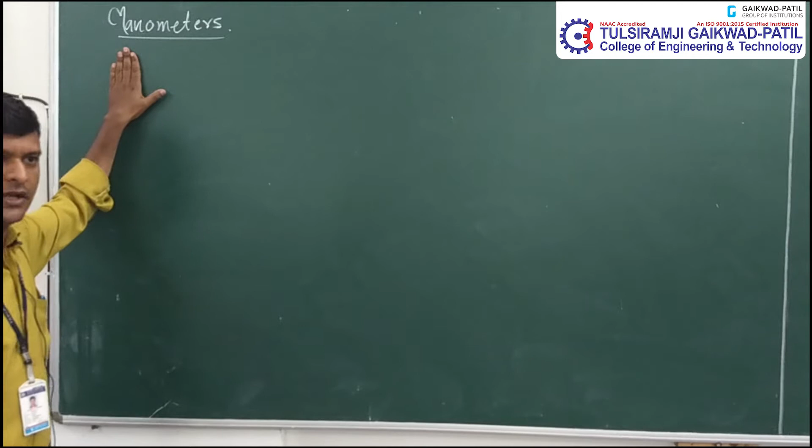So first of all, let us know what is manometer. Manometer is a device which is used to measure the pressure, by equating or by balancing the liquid column on a limb.

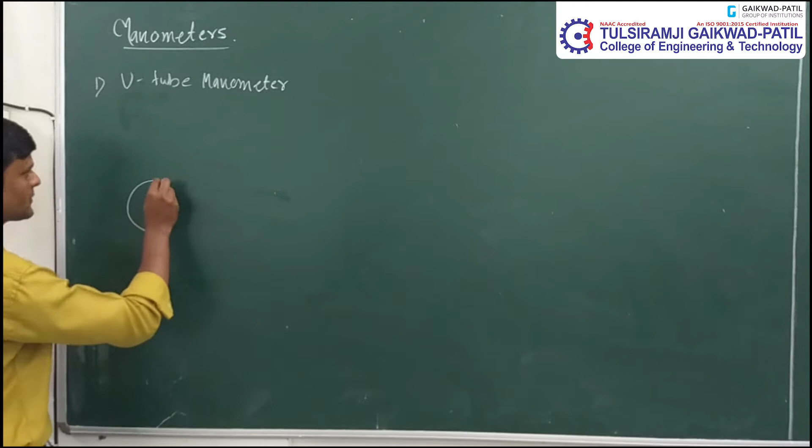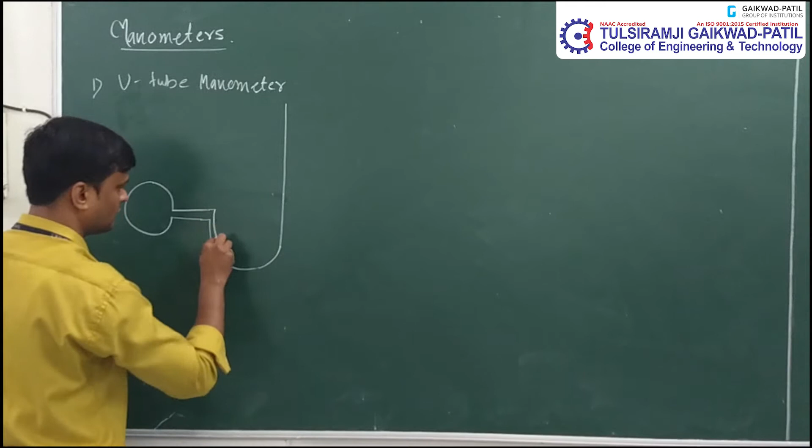There are different types of manometer. First, we will consider a simple U-tube manometer. U-tube manometer consists of two limbs. This is the simple U-tube manometer, consists of two limbs.

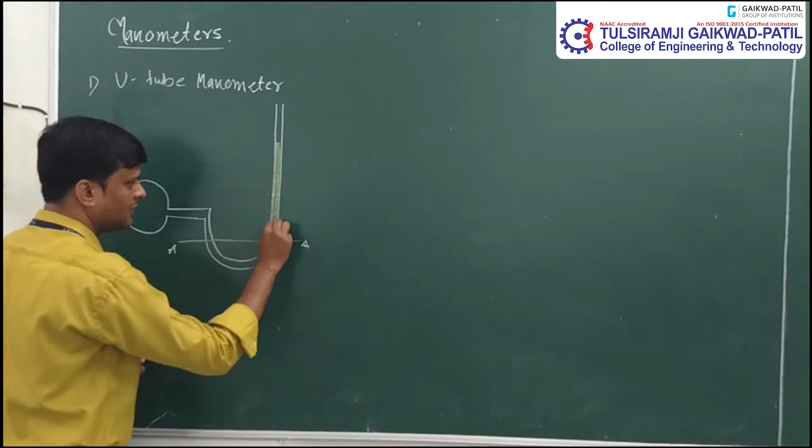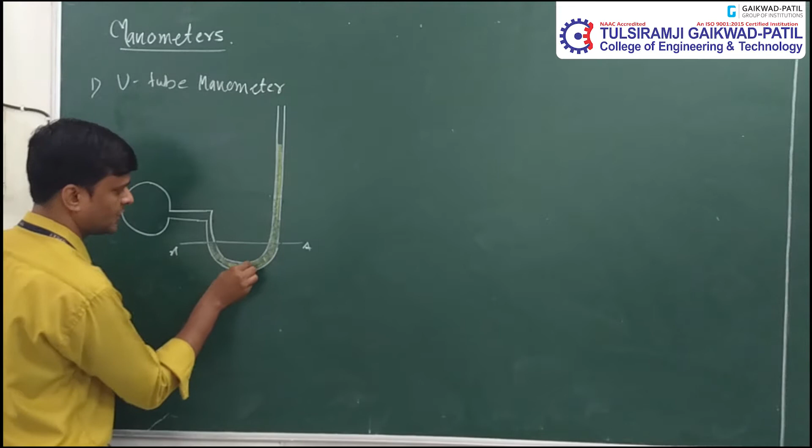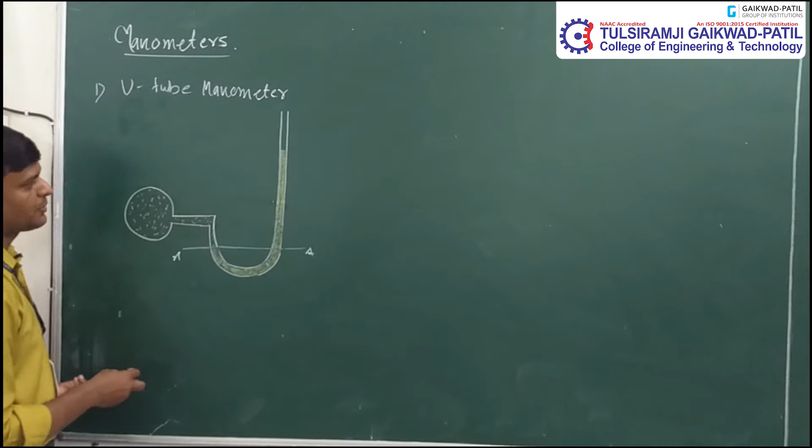This is left limb, this is right limb, and this U-tube manometer contains two different types of liquid, out of which one liquid must be heavier than the liquid whose pressure is to be measured. This is another type of liquid whose pressure is to be measured. This liquid is of low density or low specific gravity, and this liquid is having more density or more specific gravity than this liquid.

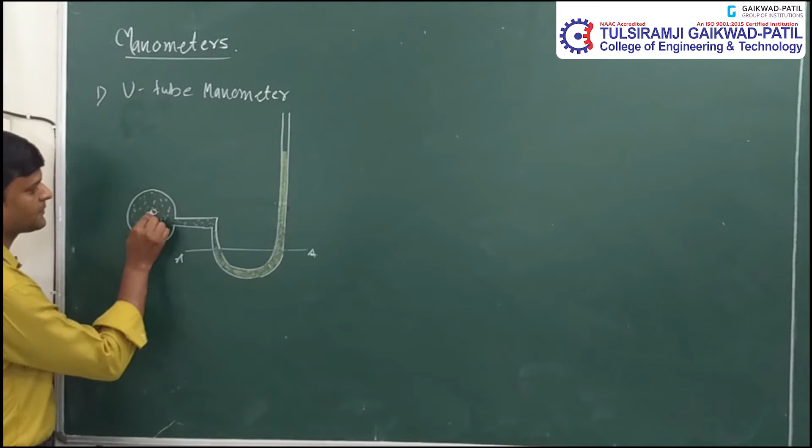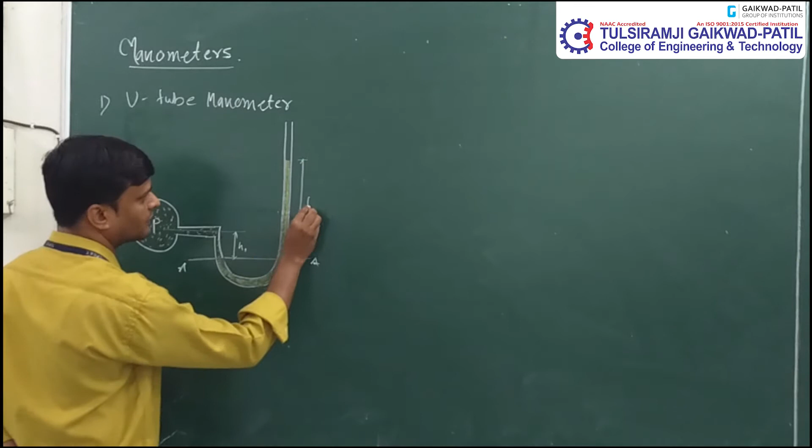So suppose this is P, the pressure which is to be measured with the help of U-tube manometer. This is the height of the liquid above the datum line on left limb. This is the height of heavier liquid above the datum on right limb, that is H2.

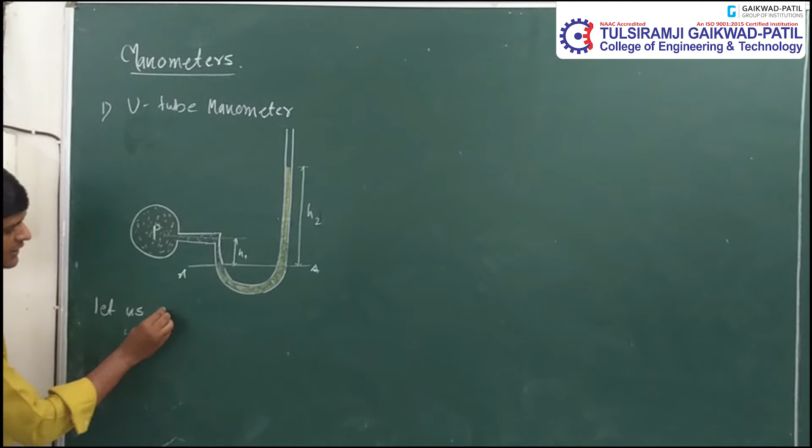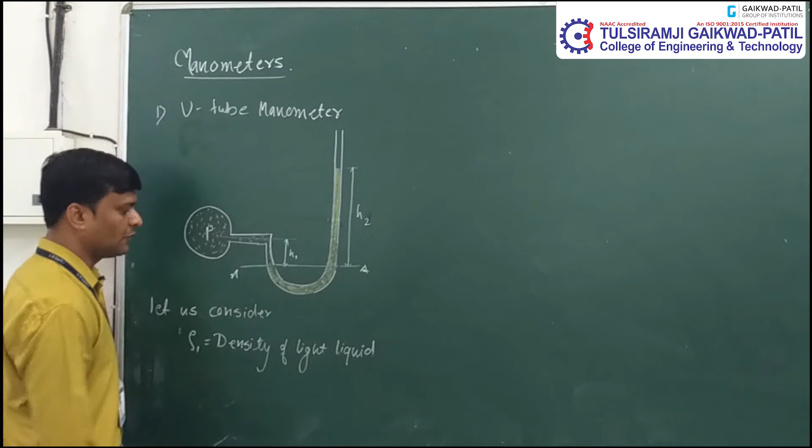Now let us consider rho 1 be the density of light liquid on left limb, H1 be the height of again light liquid on left limb.

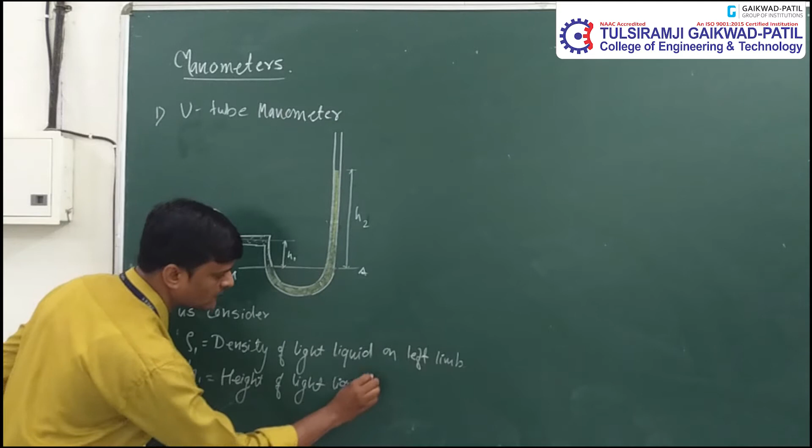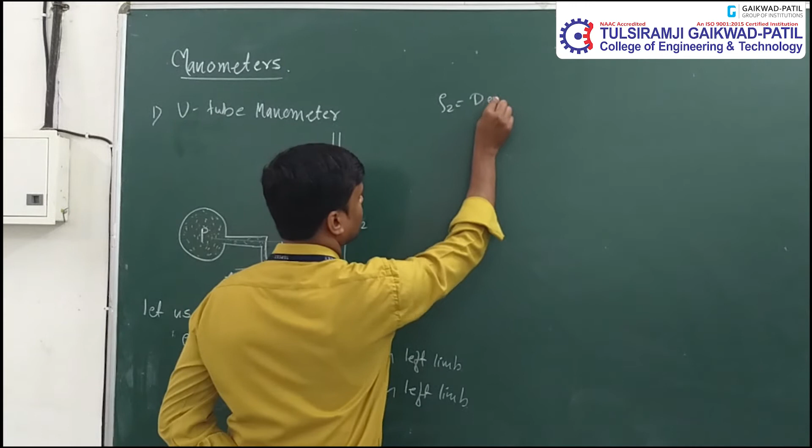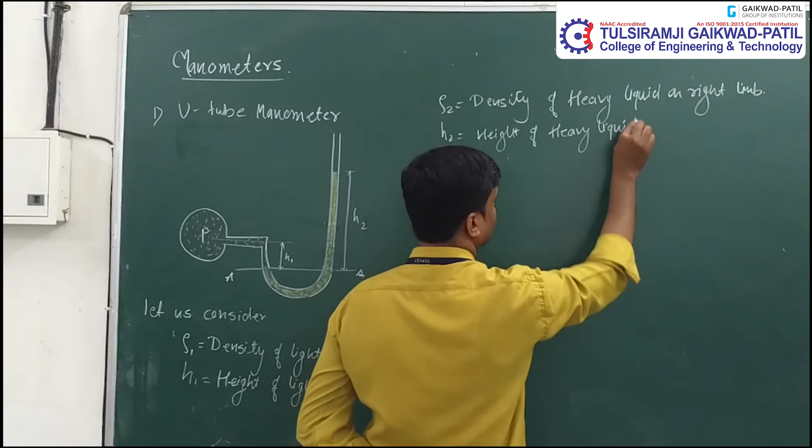Similarly, consider rho 2 be the density of heavy liquid on right limb. Similarly, H2 be the height of heavy liquid on right limb above datum.

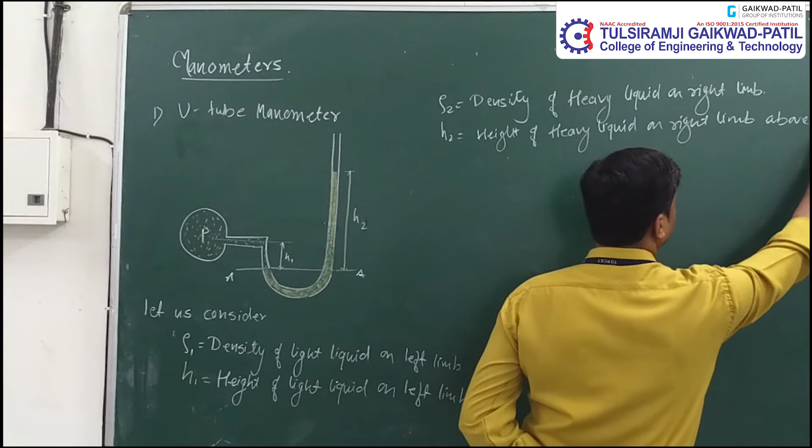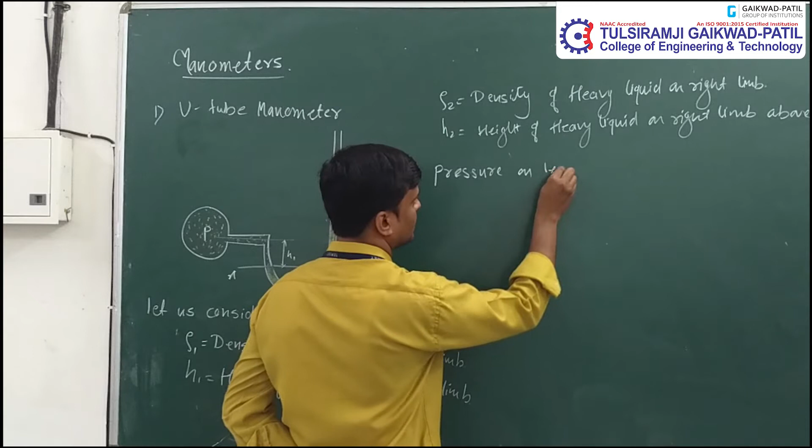So the U-tube manometer works on the principle of balancing the pressure on both the limbs. So we will consider the pressure on left limb above datum.

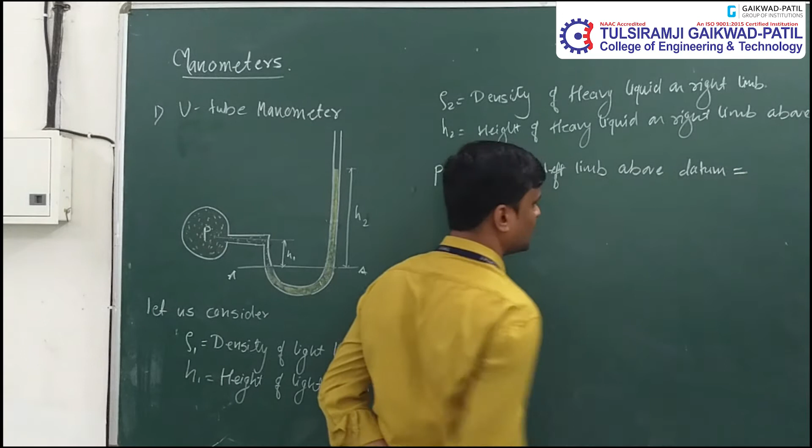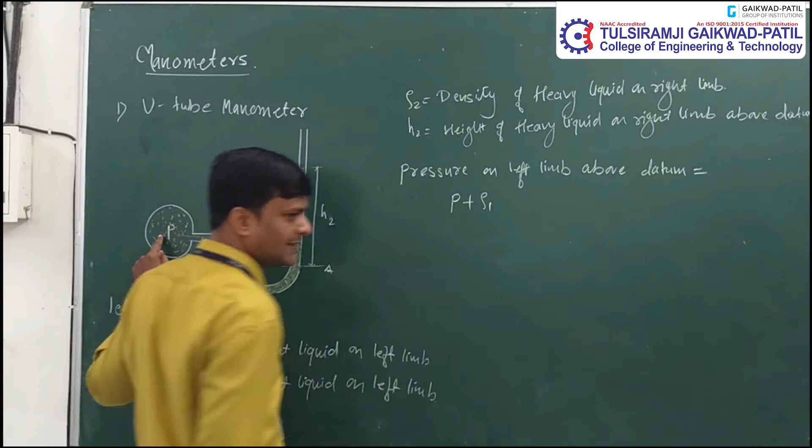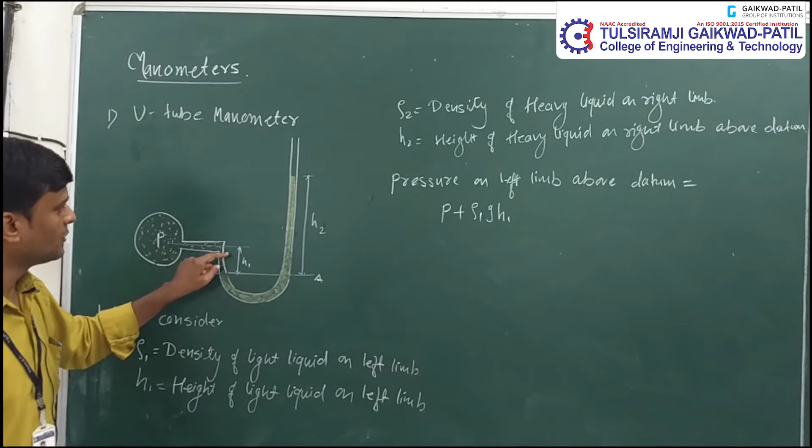Which equals to - how will we calculate pressure here? This is the pressure P unknown, this is the left limb, this is right limb. So we will consider the left limb above the datum. So this is P, pressure unknown as it is, plus the density of the light liquid into G into H1. H1 is the height of liquid whose pressure is to be measured above the datum.

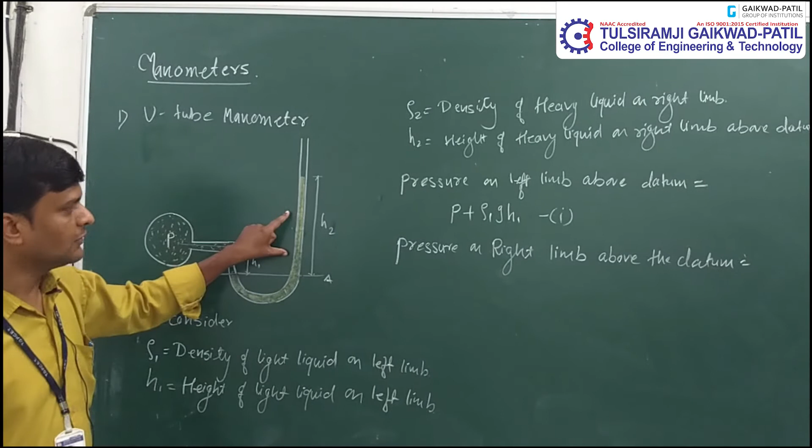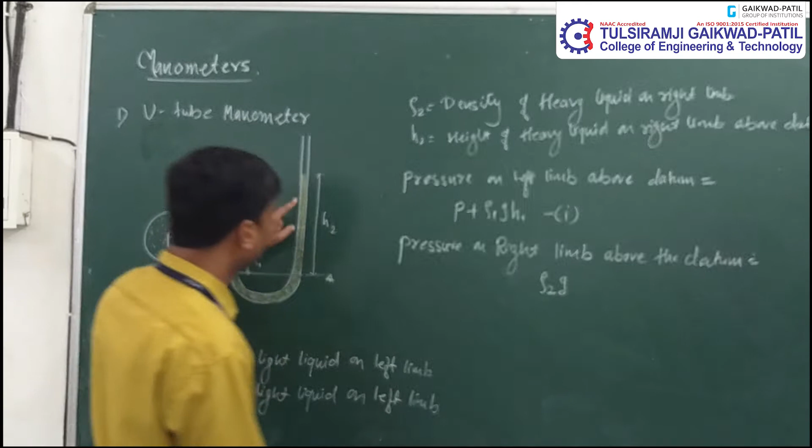Equation number 1. Similarly, pressure on right limb above the datum, which equals to - so what is on right limb? There is a heavier liquid on right limb, so density of heavier liquid is rho 2 into G into height of that particular liquid above the datum is H2. This is equation number 2.

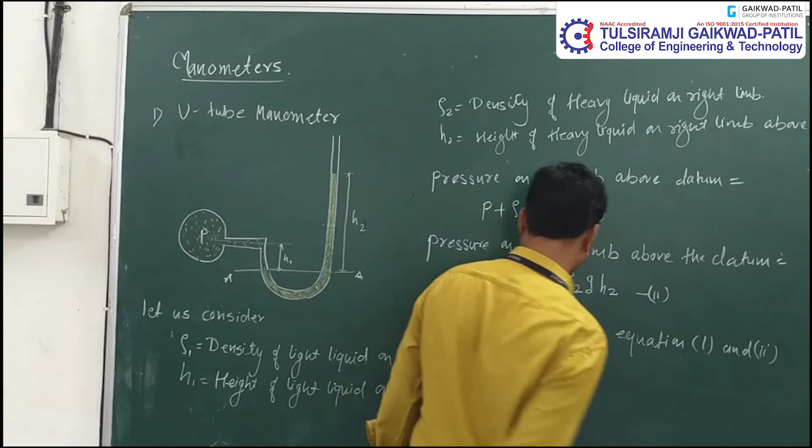Now equating equation 1 and 2. So P plus rho1 G H1 equals rho2 G H2. Therefore, we can say that P equals rho2 G H2 minus rho1 G H1.

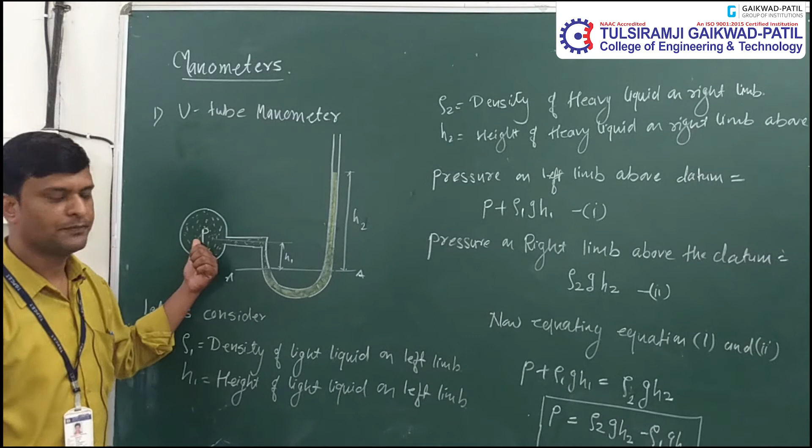So by using this equation, we can calculate the pressure which is acting on the left leg by using this equation, that is P equals rho2 G H2 minus rho1 G H1.

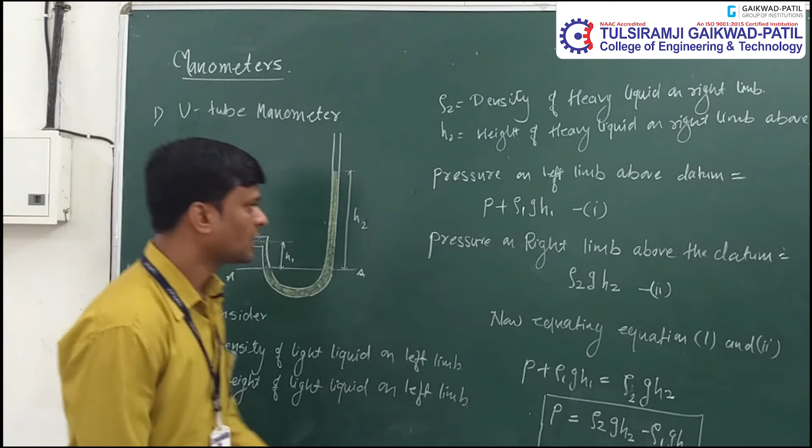Now another arrangement is for the vacuum pressure, or we can say negative pressure. So I am drawing another arrangement of U-tube manometer.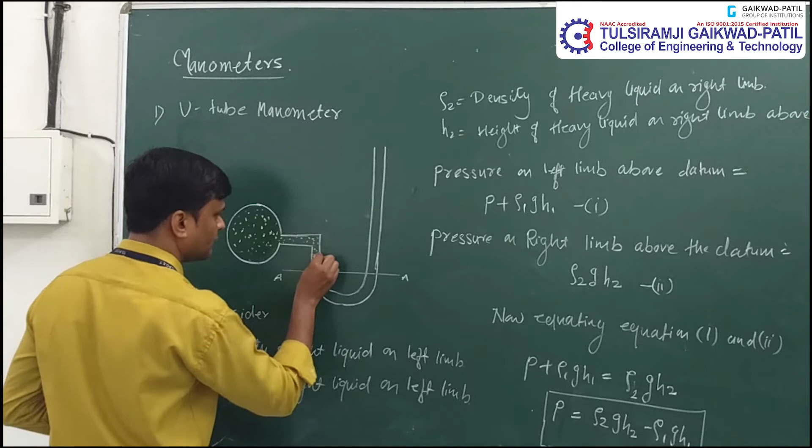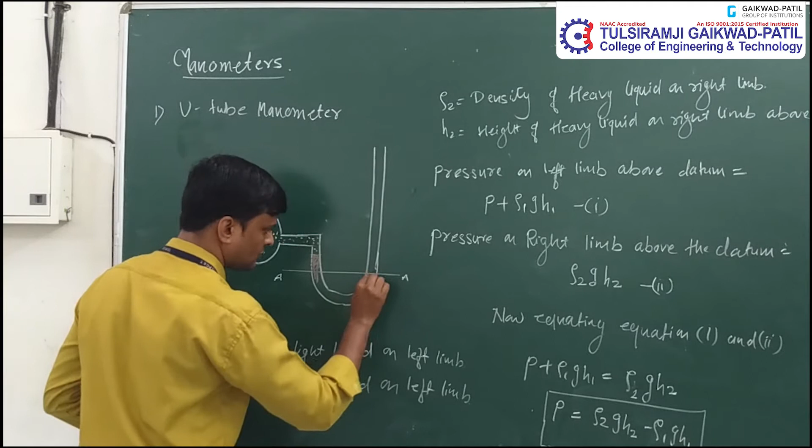Suppose this is light liquid whose pressure is to be measured, is placed on left limb. And another liquid which is present on the U-tube is heavier than the liquid whose pressure is to be measured. Now this is the height of heavier liquid H2 and this is the height of light liquid H1. Light liquid H1, and this is the unknown pressure.

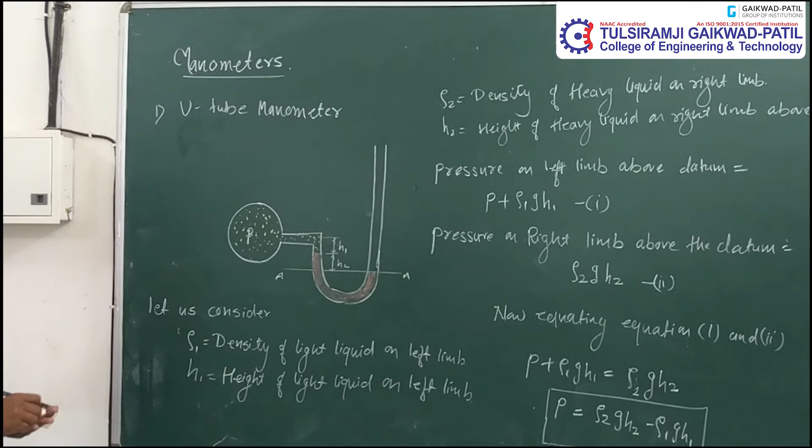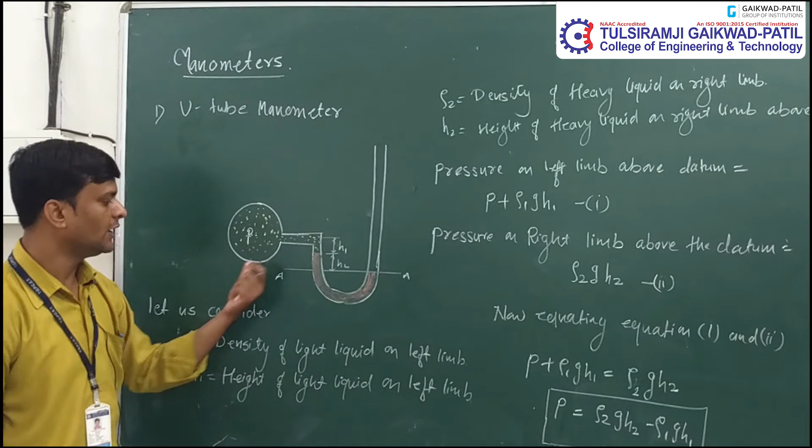So as we can see that there are two liquids on left limb only. Therefore we consider density of light liquid on left limb, similarly height of light liquid on left limb. Similarly, this is the density of light liquid and this is the density of heavier liquid on left limb, above the datum. So again, by using the same equation, pressure on the left limb above the datum.

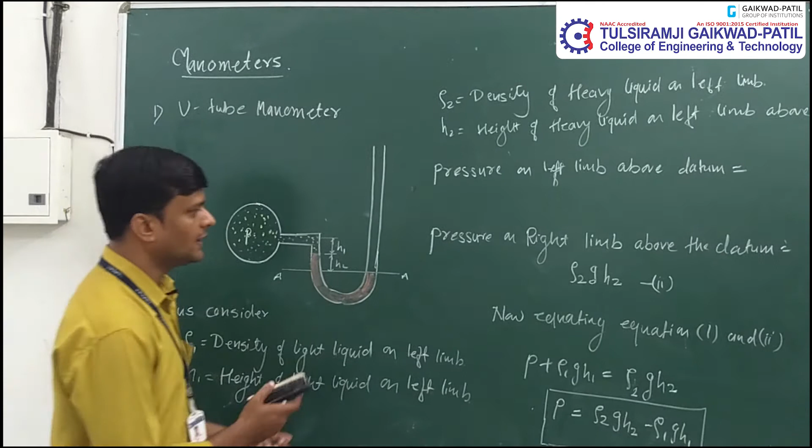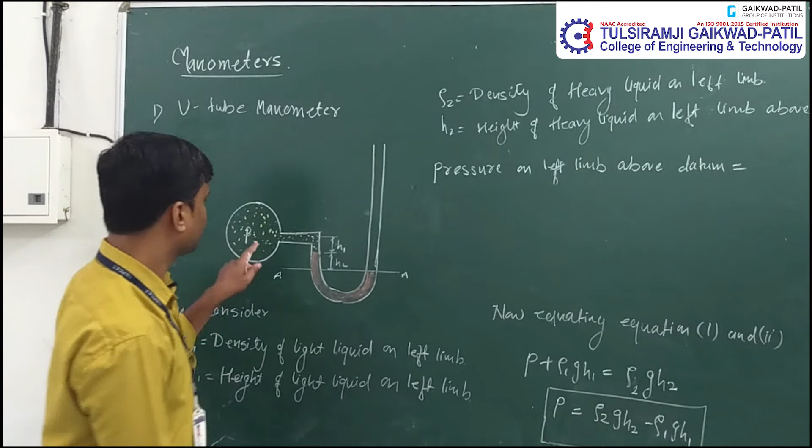So as we can see that there are two liquids on the left limb and there is no liquid on the right limb. So this will not be in consideration. So how can we write the equation to calculate the pressure in such cases? So P is unknown plus this is the light liquid in the left limb and this is the height of light liquid above the datum. So again rho1 G H1.

Now again we can see that there is another liquid of heavier density. Rho 2 be the density of heavy liquid into G into H2, equals 0.

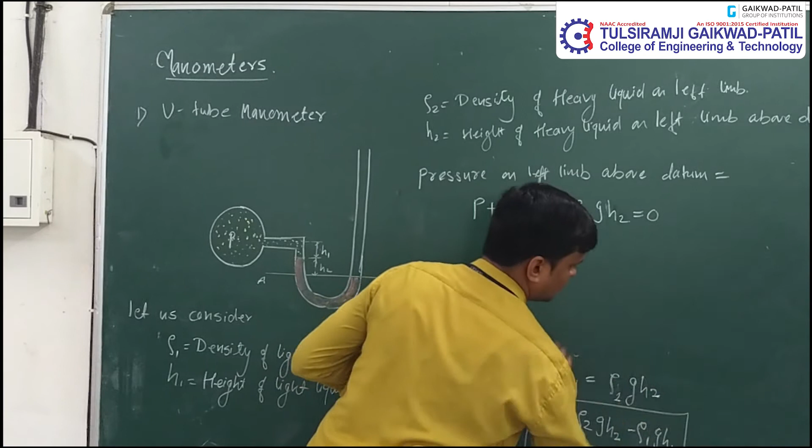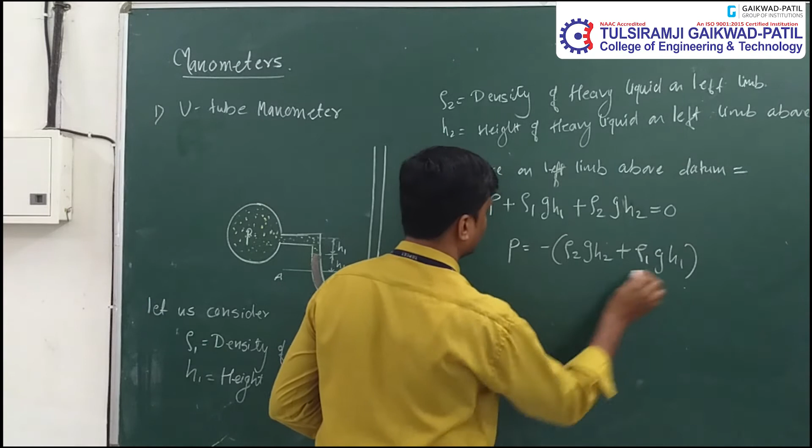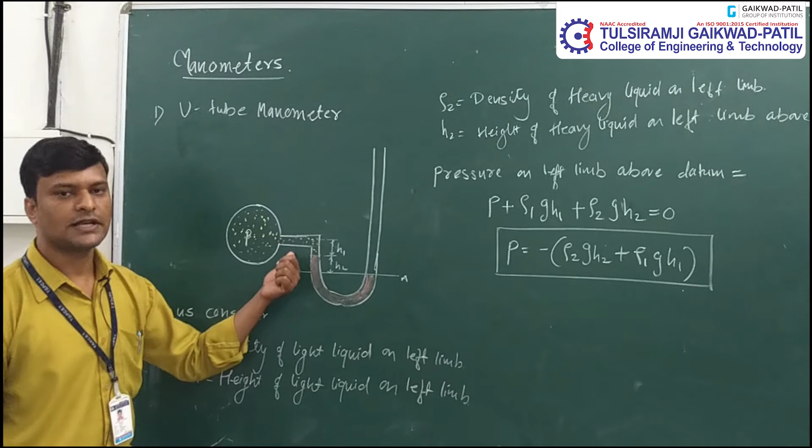Therefore, the equation to calculate the vacuum pressure or negative pressure is P equals minus rho2 G H2 plus rho1 G H1. This is the equation to calculate the negative pressure or vacuum pressure for such type of arrangement in which both liquids are present in the left limb.

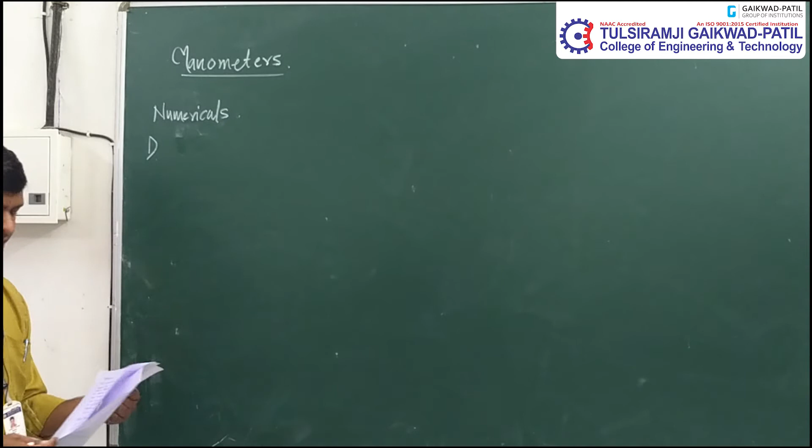So we will solve a numerical based on the U-tube manometer or simple U-tube manometer. This is numerical number 1. I am dictating a numerical based on the simple U-tube manometer.

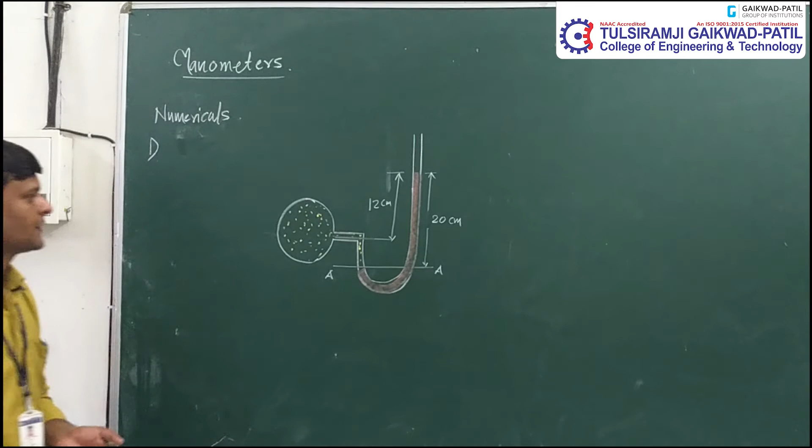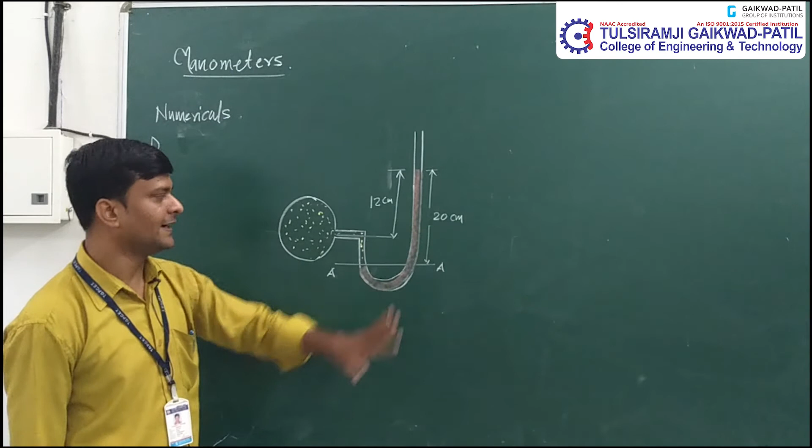So this is the arrangement given to us. A simple U-tube manometer consists of a light liquid and heavier liquid. The distance of heavier liquid from above the datum is 20 cm, the difference of mercury level is 12 cm. And what we have to find is the pressure which is acting on this particular liquid.

We are provided with the specific gravity of the light liquid, that is 0.9. Specific gravity of the light liquid means this liquid has specific gravity 0.9, and such type of arrangement is given to us.

To find: what we have to find? Pressure which is acting on this particular point. So, solution.

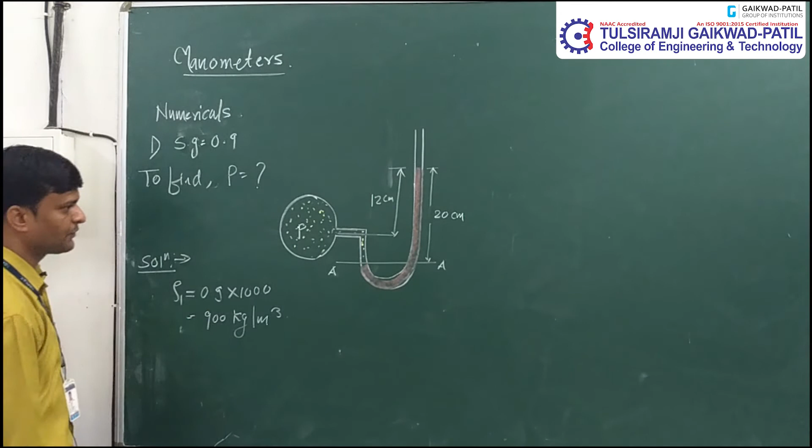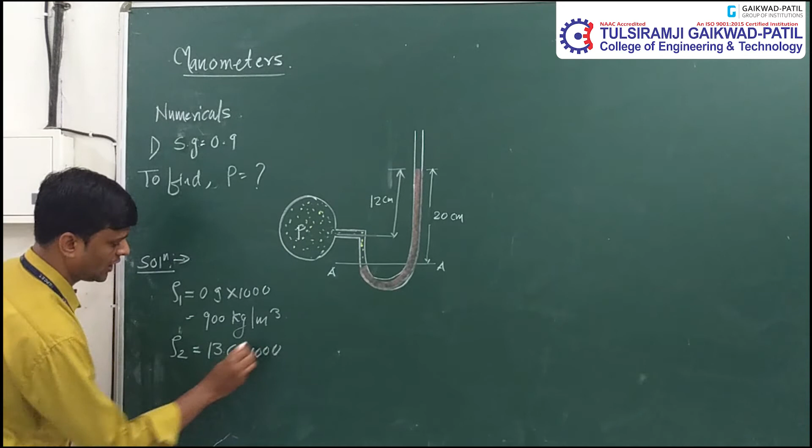As the specific gravity is given to us, therefore density of the light liquid is 0.9 into 1000, that is 900 kg per meter cube. Now, as this is mercury, therefore the density for the mercury is 13.6 into 1000, that is 13600 kg per meter cube.

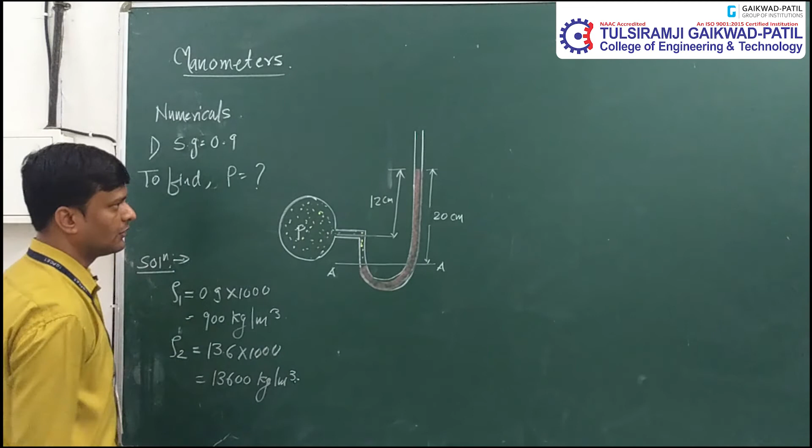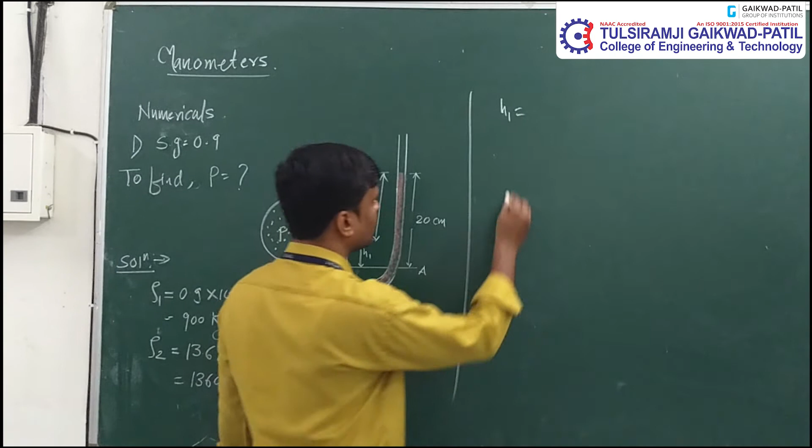Now again, H1. What is H1? H1 will be this distance, but this is not given to us, we have to calculate. So total distance, this much distance is 20 centimeter, and this much distance is 12 centimeter. So remaining distance is H1. Therefore H1 will be 20 minus 12, that is 8 centimeter, means 0.08 meter. So this is the value of H1.

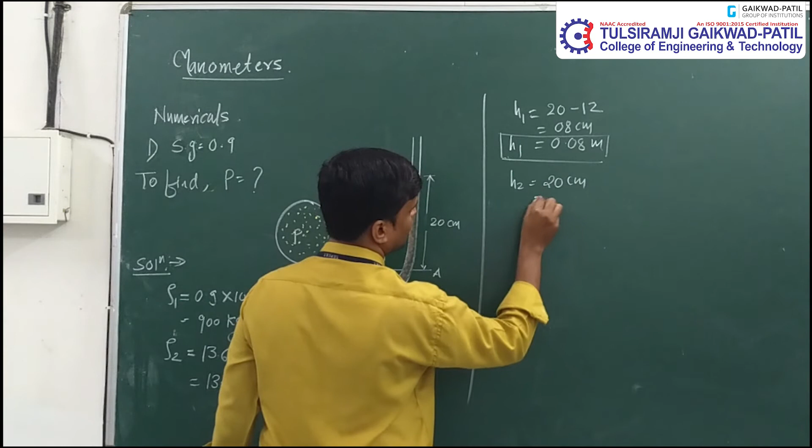Now what is H2? H2 is given to us, that is 20 centimeter, means 0.2 meter. Now we have density of light liquid, density of heavy liquid, height of light liquid and height of heavy liquid.

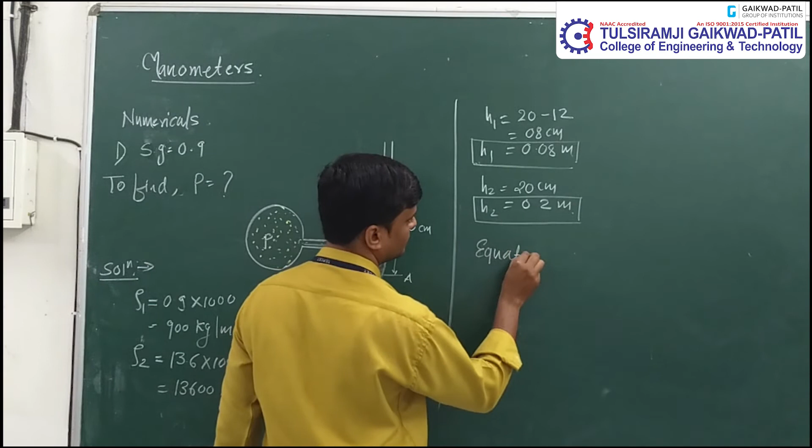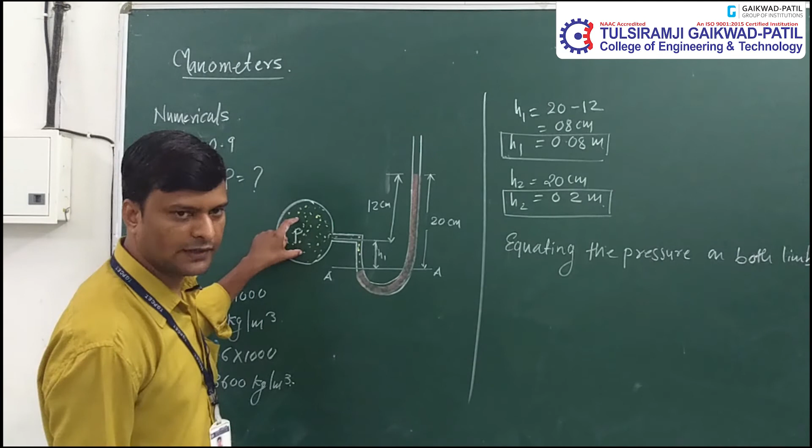Equating the pressure on both limbs, so first we consider the left limb: P unknown plus ρ1 G H1 is equals to ρ2 G H2. This is the equation. Therefore P is equals to ρ2 G H2 minus ρ1 G H1.

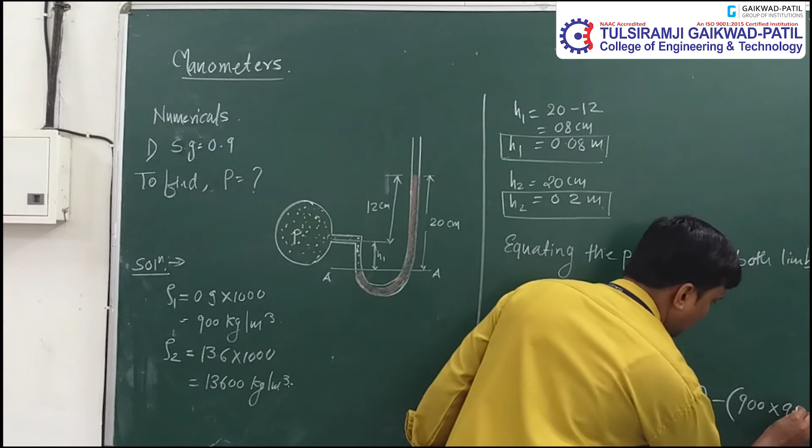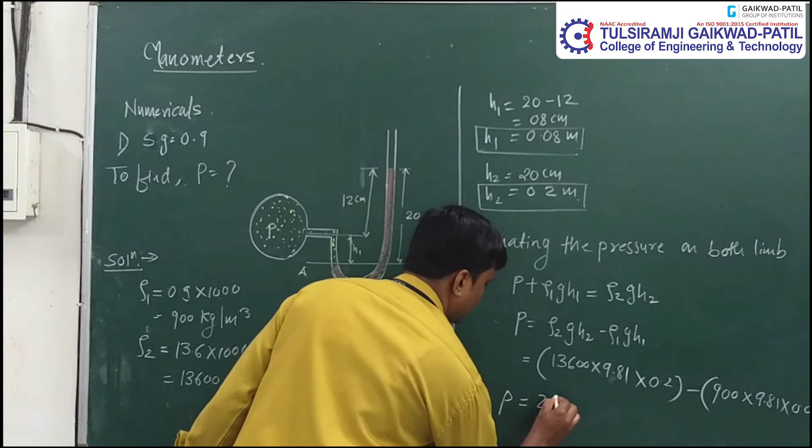Now after putting all the values in this equation, what is the value of ρ2? 13600 into 9.81 into height of 0.2 meter minus ρ1, density of light liquid is 900 into 9.81 into 0.08. After calculating this, we get the value of pressure as 25977 Newton per meter square.

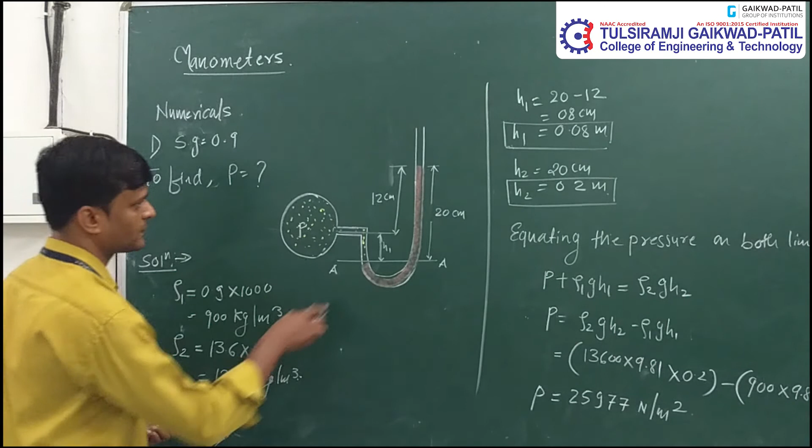So in this way we can calculate the pressure which is acting on the U-tube manometer. Now another numerical, we will take another one for calculating the negative pressure. We will take another arrangement.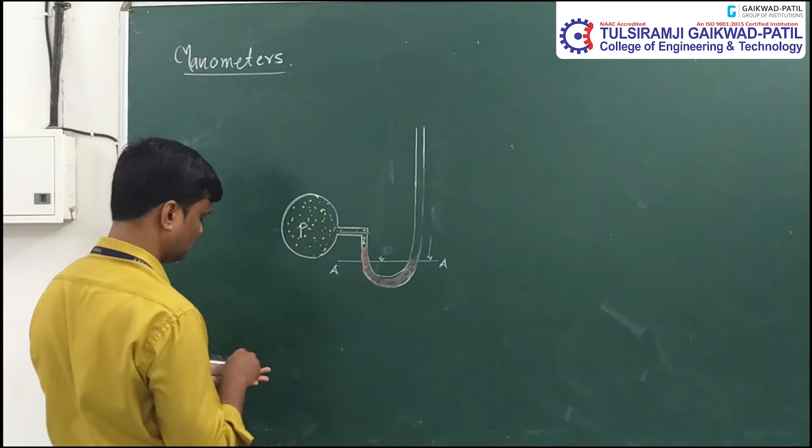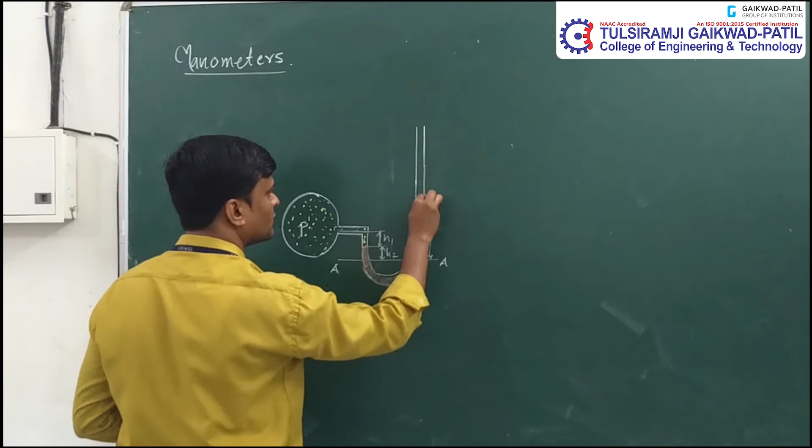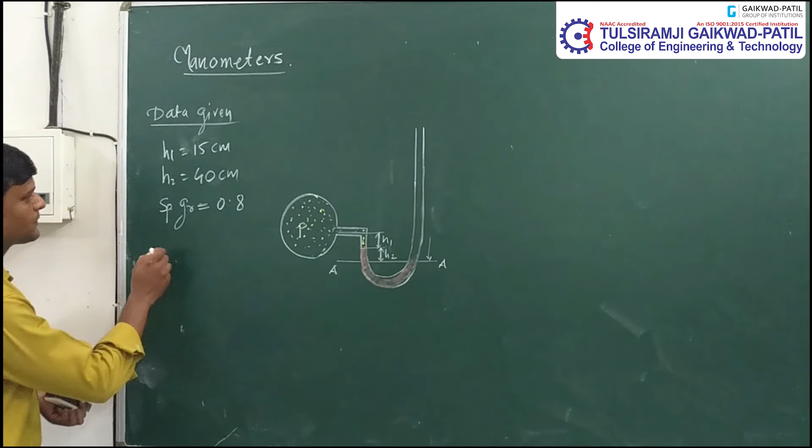This is H1 and this is H2. So data given, I am writing what is given in the numerical. H1 is equals to 15 centimeter given to us, and H2 is 40 centimeter given to us, and specific gravity of light liquid is 0.8. This is mercury, the heavier liquid.

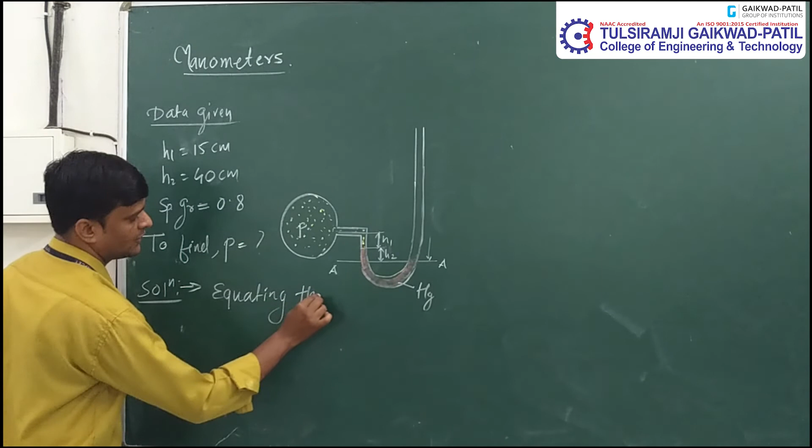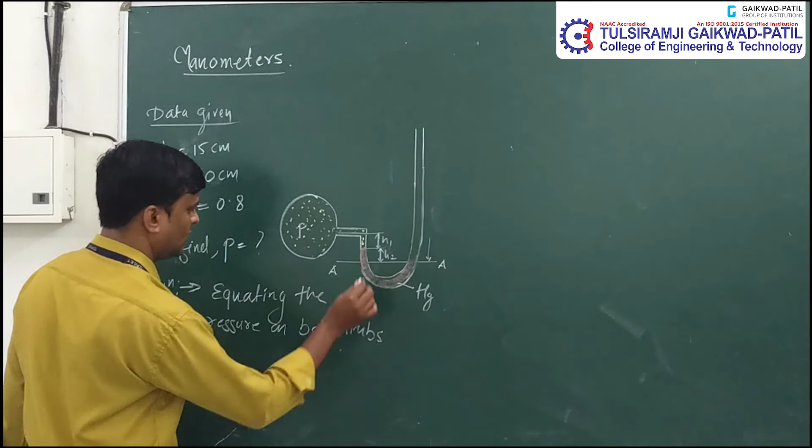To find again, pressure, we have to find pressure. So we will start with the solution. So directly I am writing, equating the pressure on both limbs. So we can see there are two liquids on the left limb.

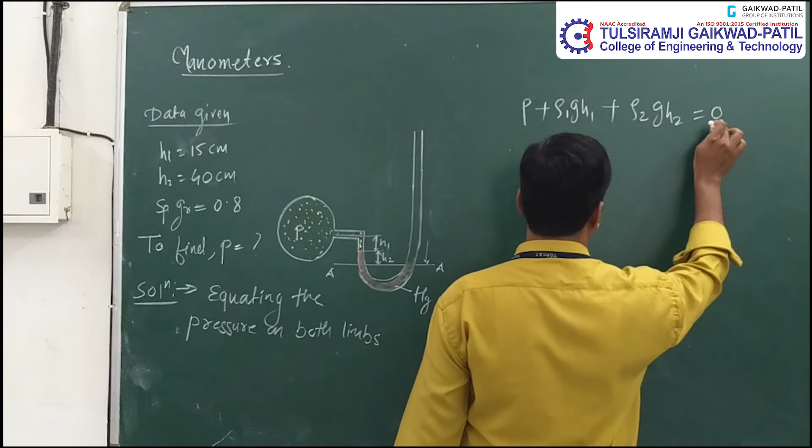So again we write the equation: P plus ρ1 G H1 for the light liquid, this is the height of light liquid, again plus ρ2 G H2 is equals to 0. Why 0? Because there is no liquid present on the right side of the limb.

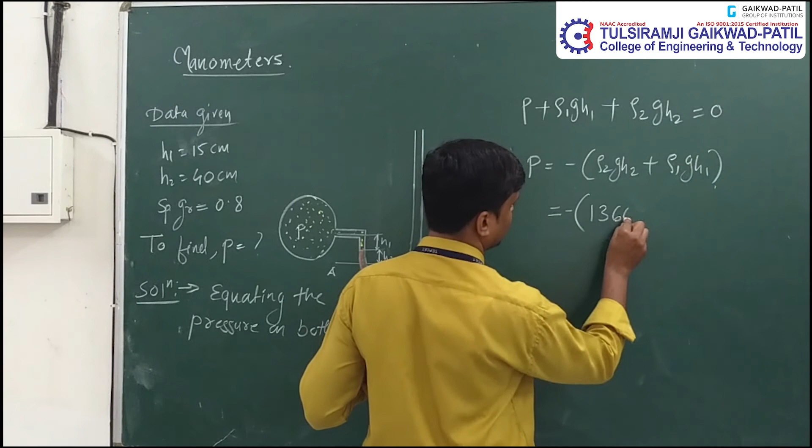Therefore P is equals to minus ρ2 g H2 plus ρ1 g H1. Now after putting all the values in the above equation, we will get the value of ρ2. Rho 2 means mercury, the density for mercury is 13600 into 9.81 into H2.

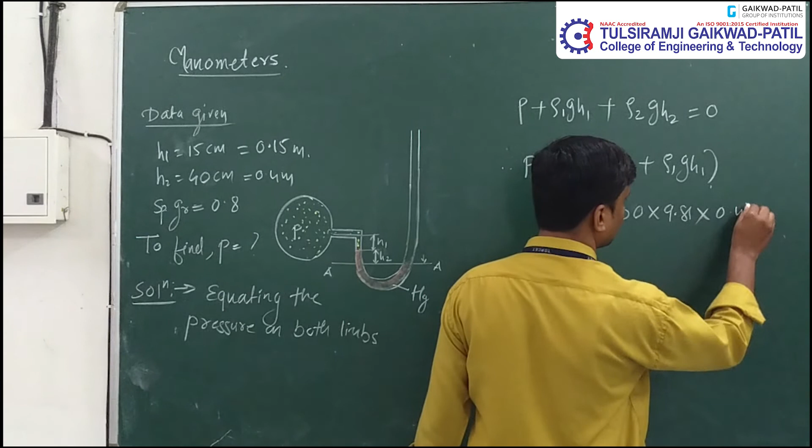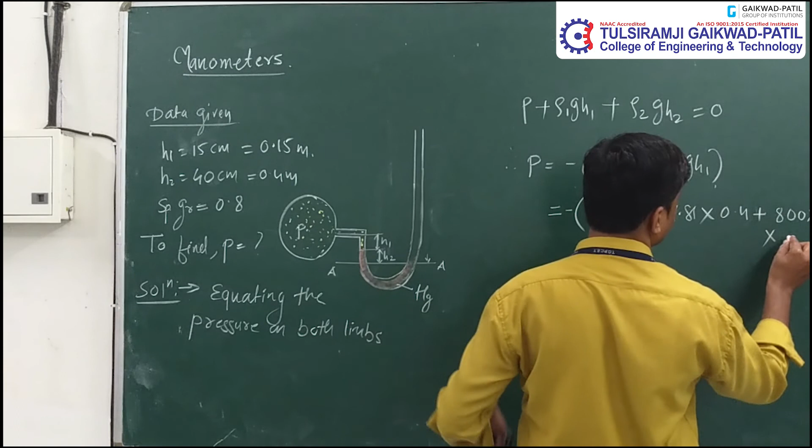H2 is given to us as 40 centimeter, we'll convert it to meter, that is 0.4 meter. Plus ρ1, rho 1 means density, this is 800 into 9.81 into H1, which is 0.15 meter.

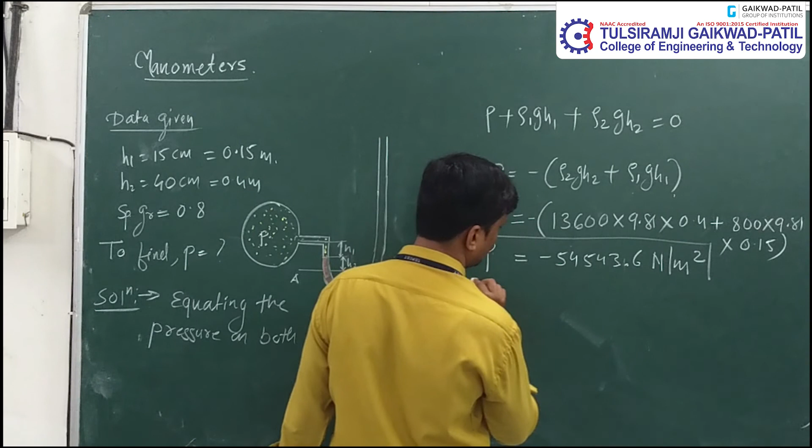So after calculating the above value, we get minus 54543.6 Newton per meter square. So negative sign indicates there is a vacuum. Negative sign indicates this is the vacuum pressure.